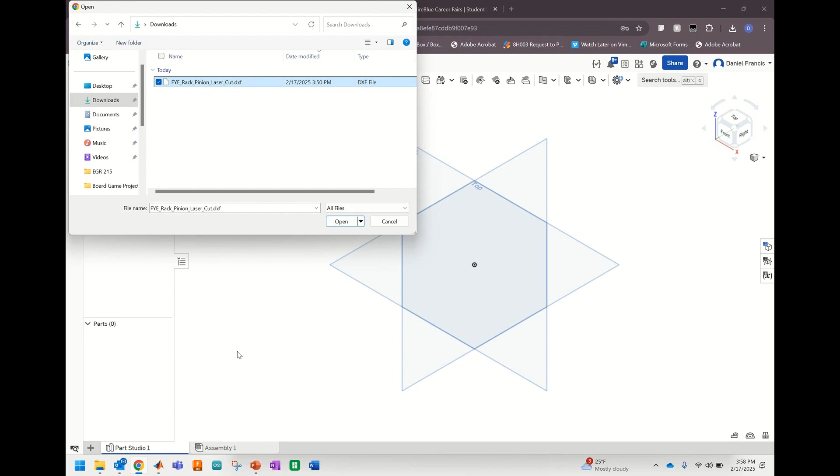I'll go to my Downloads. This file is available on the Week 7 assignment page. So for the rack and pinion part of the assignment, this file is on that page, so you can go download it. When you have it downloaded, import it into Onshape, just like I'm doing here. It'll import and it'll make a new tab at the bottom called the FYE Rack Pinion Laser Cut. We're not going to do anything with this tab. We're going to go back to the Part Studio.

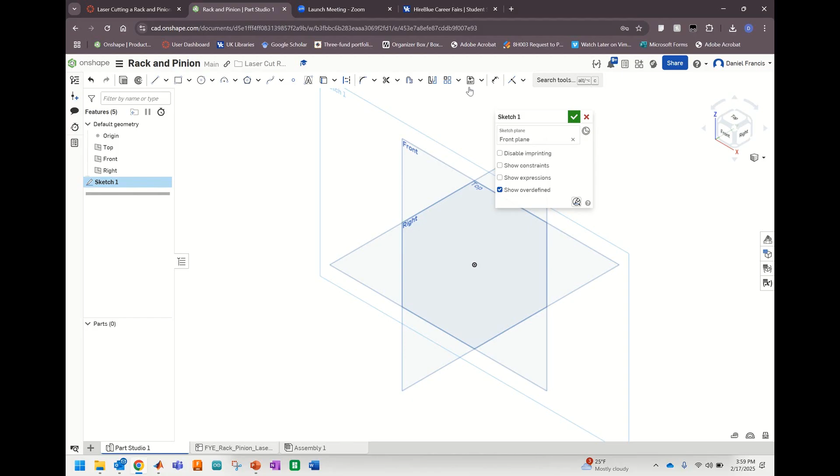We'll do a new sketch, so we'll click on Sketch. I'm going to click on the front plane, and then up here at the top, there's a tool that says Insert DXF or DWG. We're going to click that. Make sure it says the current document, and then we'll click on the FYE Rack Pinion Laser Cut DXF. Hit that check mark. Hit this check mark again to finish the sketch. Click on front, and now we have a sketch of the rack and pinion you're going to assemble.

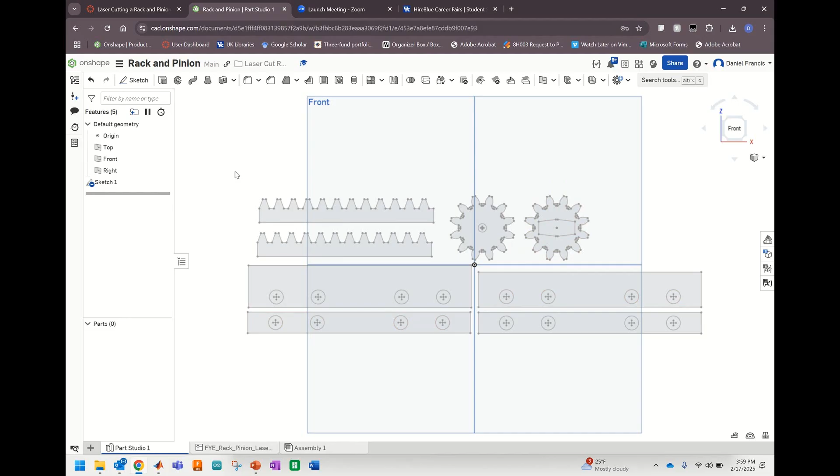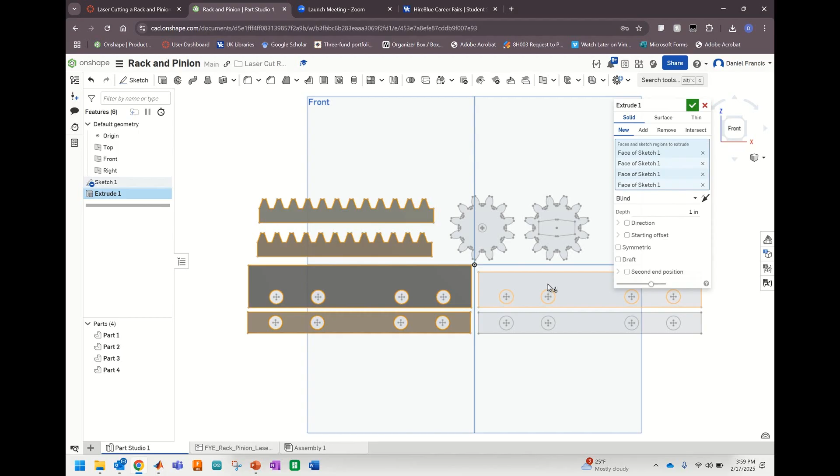The next thing we need to do is extrude these sketches to make them three-dimensional. So we'll go up here to the extrude tool, move this out of the way, and I'm going to click on everything that I want to extrude. So click on this, click on this, click on this, click on this. Make sure the holes are not being extruded. Click on this, click on this, click on this gear. Make sure this inner hole here is not being extruded. And same thing with this small hole here. So make sure there's a hole, there's a slot, and there's 4 holes in each of these bottom parts.

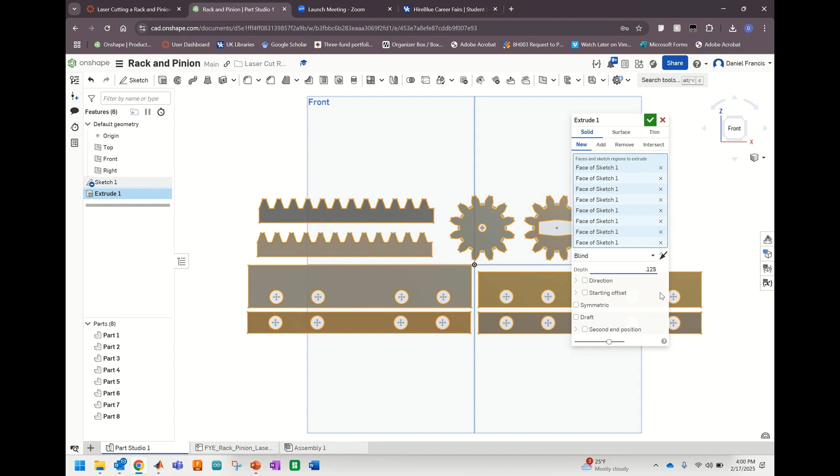So when you have everything selected, come down here where it says depth, change that from 1 inch to 0.125 inches, solely because that is the thickness of the plywood we're using. And then hit check. So now all of our parts have been 3D modeled. So you can see they actually have depth to them now. So now we'll prepare these to be laser cut.

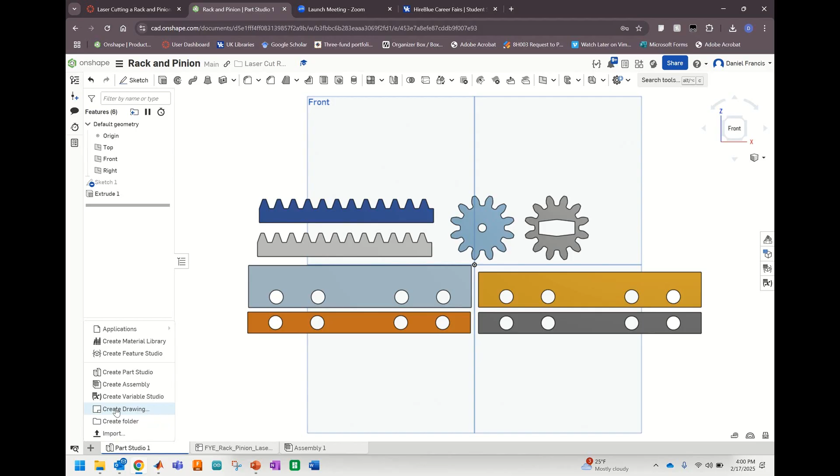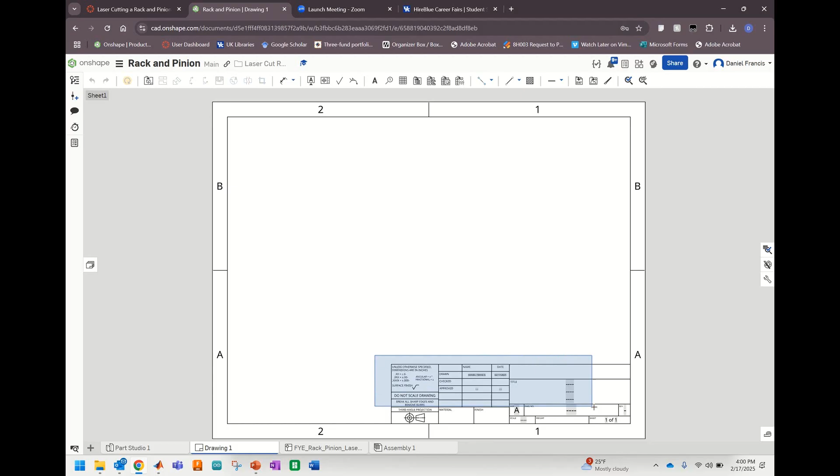To do that, we'll go down to the plus again, click on Create Drawing, leave it as ANSI A inch, hit OK. I'm going to close out of these for a second. So this is a drawing file. This is where we can take three-dimensional drawings and put them in top-down view and get them ready for laser cutting. The first thing I'm going to do is just get rid of this title box in the bottom right corner, solely because we don't need it for the laser cutter.

Again, if you were doing actual engineering jobs where you were drawing things for a customer, you'd want this drawing box so you keep track of who was drawing, what revisions were made, and so on. But in this case, since we're laser cutting, we're just going to delete it. Get rid of this last little bit. Now that we have a blank template, we'll go back to the Insert. So this button right here which says Insert View. Click Insert, and then we'll start bringing in each of the parts we're going to laser cut.

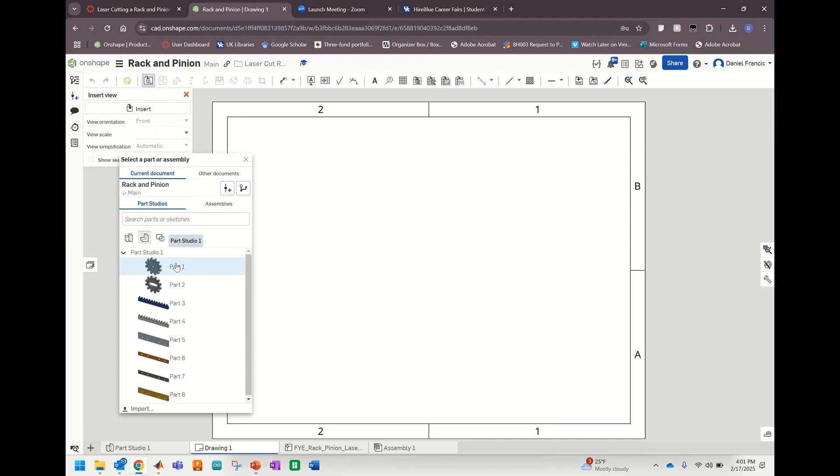So part 1, change the scale from 2:1 to 1:1, and then put it wherever you want to in the drawing template. Onshape will try and do side views and isometric views of the part we're putting in. We don't need that for the laser cutter, so we'll just hit Escape. I'm also going to click on this gear, right click, and go to Show Hide, Hide Auto Center Marks. Get rid of those marks on the hole there.

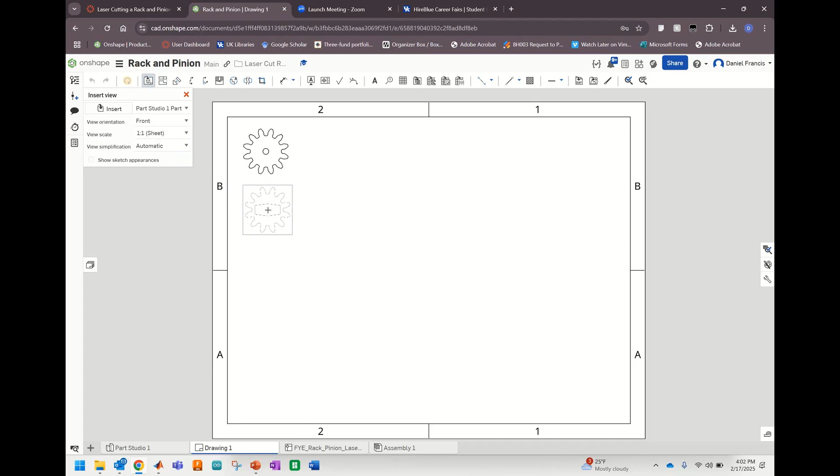And so we'll go back, insert again, go get the other part, part 2, bring it in. Now it defaults to 1:1. So we'll click it again. I'll actually put it up here. Click where you want, and then hit Escape. And then repeat the process. Bring in every part we need. So now we need part 3.

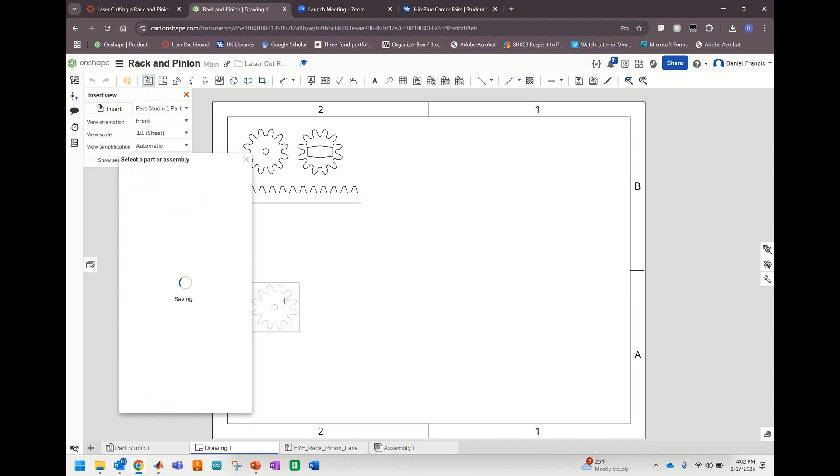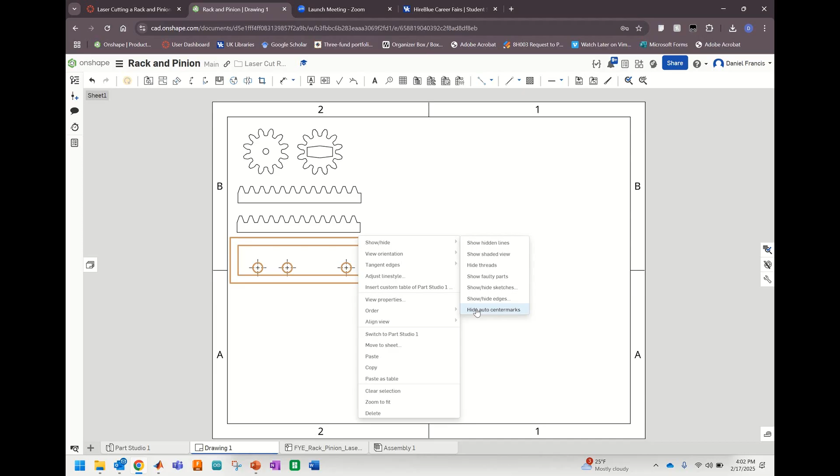Hit Escape. Bring in part 4. Hit Escape. Part 5. Hit Escape. We're going to do the same thing. Click on this, right click, Show Hide, Hide Auto Center Marks. Part 6 now.

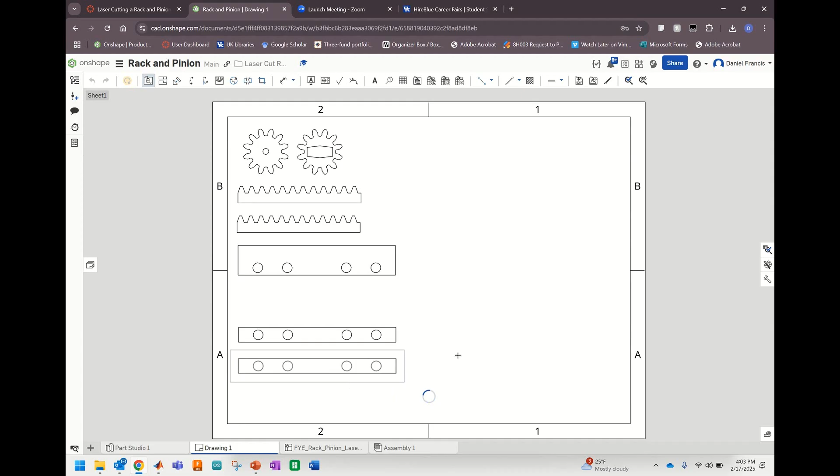Click on it again, right click, show hide, hide auto center marks. Part 7. Hit escape, click, right click, show hide, hide auto center marks. And then one more part. Part 8. And we will have to hide those center marks one more time. So we'll click on it, right click, show hide, hide auto center marks.

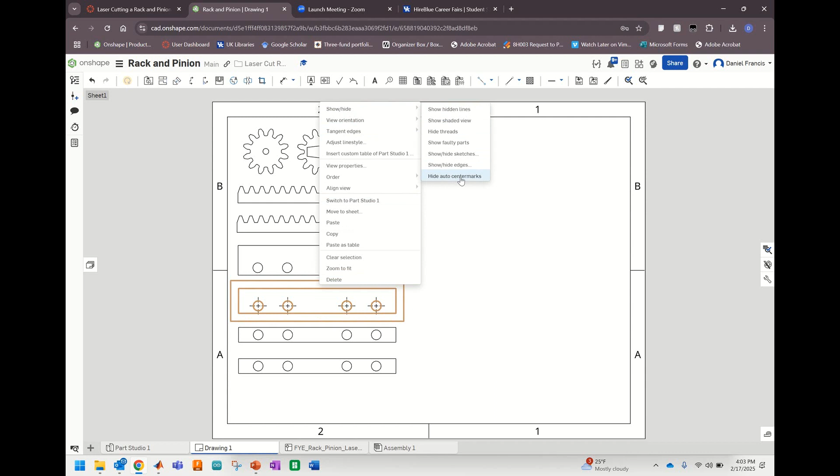So now we have 8 parts all ready to be sent over to the laser cutter. To get this ready to go to the laser cutter, come down here to drawing 1, right click, export, name it whatever you want, export it as a PDF, and then that PDF is then ready to be brought into Adobe Illustrator and prepared for the laser cutter. And now we'll go and look and see how to actually assemble the rack and pinion together.

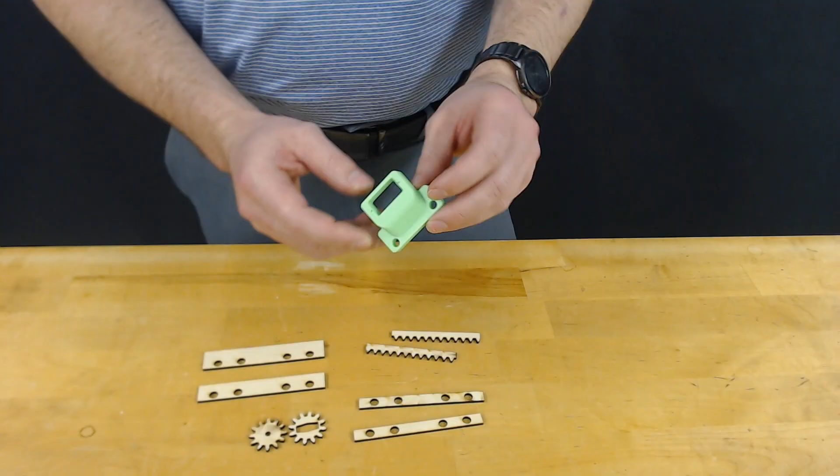So when you get done laser cutting, you'll have these 8 parts. You'll have the 2 gears, these 4 parts with the holes in them, and then the actual rack, the bar with the teeth on them. In addition to this, you'll need a servo mount, which you should be given by your instructor. If not, if you want to print one yourself, you can. You've already made this. You made this in week 4, but every instructor should have enough for each team to have one. Also in your kit that you were given by your instructor, you should have a 1/4 inch dowel, which you'll need to assemble this.

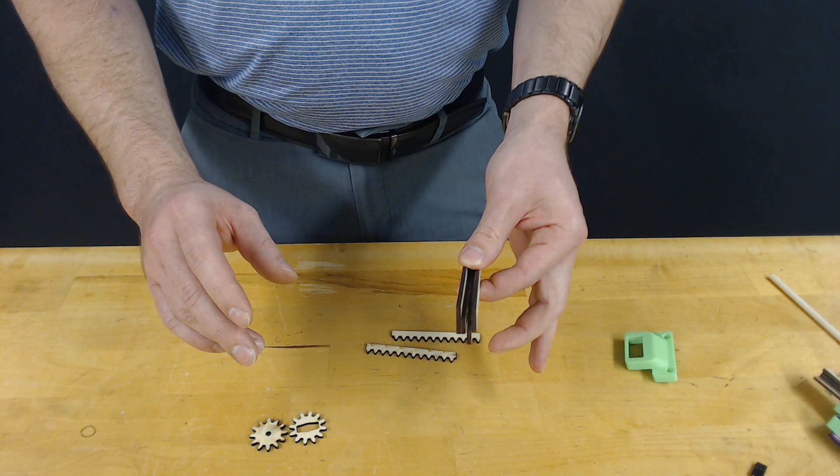The servo mount lines up with the 2 holes in the back. You'll run a dowel through the servo mount, through these pieces of wood, glue it all together, and then you'll put a dowel at each of the ends of the holes. So you have 4 dowels in this holding together. You'll also go ahead and glue the rack together. So you have 2 pieces of rack. You just glue them together using wood glue or super glue or whatever glue you have. And then, of course, you'll take the 2 gears and glue them together as well to line up the teeth and get them all glued together.

One thing to note with the gear is when you have it glued together, there's a nice slot in the back that is designed for the servo horn to fit on. So in each of your kits, you should have servos, and there should be these plastic horns. They're either white or black, depending on what servo you have. They're the same size, just different color. To make it fit in the slot, trim off the ends of the servo horn to make it fit in the actual slot. You can use scissors, a knife, wire cutters, whatever you do to be safe. Make sure you don't cut yourself, but you'll trim off the excess to make it fit in a slot, and then glue this into that slot and make sure to align this hole that goes on the servo with the hole on the gear.

When you have everything glued together, you can put your servo into your mount. There's 2 screws that go into the servo. These are the flat pan head screws, and then there's a smaller screw in the bag of your servo that holds the actual gear onto the servo that goes into the servo mount that is then glued into the back of your gear.

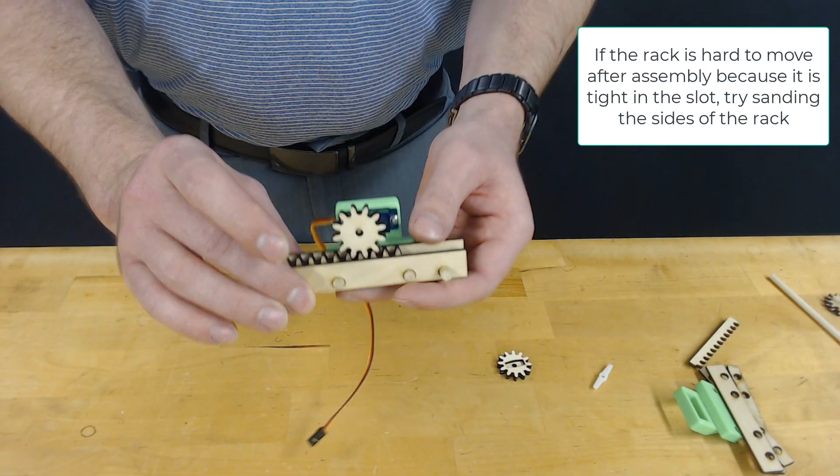So all in all, get your laser cut parts, cut your dowels using the saws in the classroom or in the Innovation Center, glue everything together, screw your servo in to the servo mount holder, and then screw your gear onto your servo, and then you'll have a rack and pinion that moves with the servo. When you're done with that, take a picture of this assembled and submit that as your portion of the week 7 assignment.